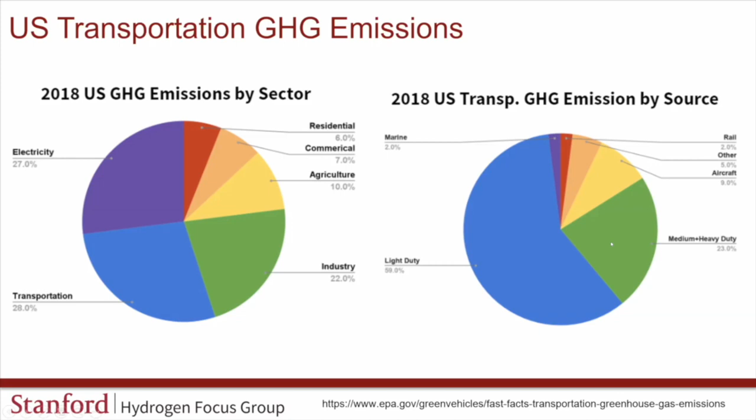So this is our goal. California has some of the most aggressive heavy-duty decarbonization policies.

Here's the one for buses that's being very transformative, the Innovative Clean Transit Regulation enacted by the California Air Resources Board. Starting in 2023, 25% of new transit bus purchases have to be zero emission. This continues until after 2030, when you can no longer purchase a diesel bus. By 2040, the complete fleet has to be zero emission.

The parallel to that for trucks is the Air Resources Board's Advanced Clean Truck Regulation, which states that beginning in 2024, manufacturers have to start selling a certain percentage of their new vehicles as zero emission.

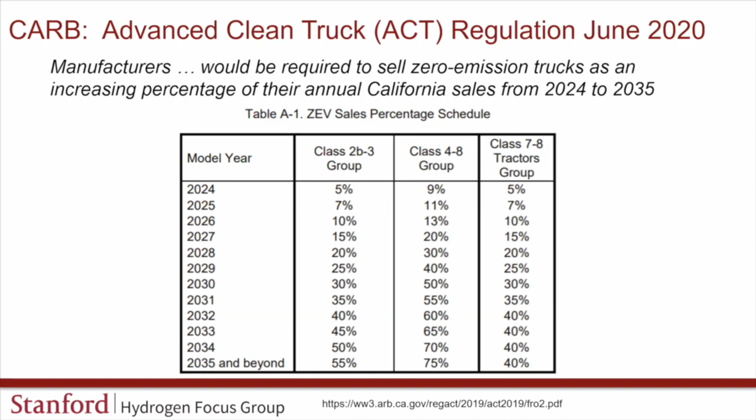Finally, last year, Governor Newsom issued an executive order stating that all drayage trucks have to be zero emission by 2035. And by 2045, all heavy duty vehicles have to be zero emission where feasible.

Transforming an entire industry is really challenging. This transformation will actually affect all of us, as heavy duty freight transport is the main vehicle we use to transport freight across the whole country. So if we are to be successful, we need to optimize across the different options. We are all in this together.

To shed light on the two leading approaches to zero emission heavy duty vehicles, we have compiled an amazing list of speakers from the heavy duty transport industry in trucks and buses. They will help us understand the trade-offs of two of these leading approaches, which is battery electric and hydrogen fuel cell electric vehicles. So without further ado, please help me welcome our first speaker, Ash Corson from Toyota, the Senior Manager of Electrified Vehicles and Technologies. Over to you, Ash.

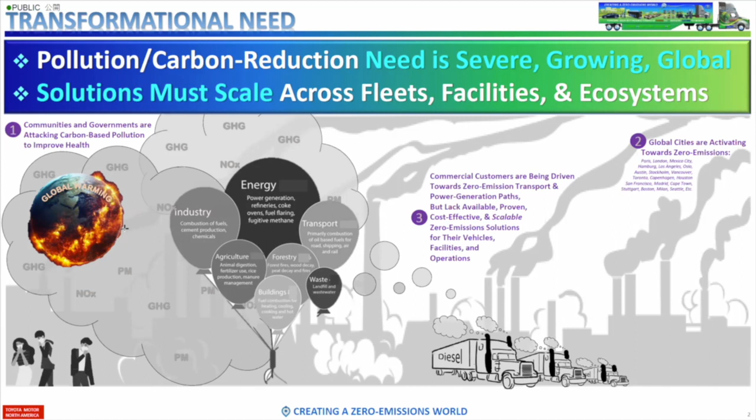The other thing too is that it's an energy transition, right? It's not just simply flicking a light switch. There's a time component to all this, there's an asset component to this. So really electrification is helping customers in their existing asset base and operations transform to zero emissions in the most intelligent way possible. So well described again by E and Jimmy, we're all quite aware of this need for transformation, carbon reduction. It's a severe need, it's growing, and it's global. And the solution, importantly, has to scale across these fleets, facilities, and port type ecosystems that I mentioned.

That solution need is also accelerating. On the public's front, you see a lot of stakeholders accelerating their call to action for zero emissions vehicle adoption at scale. As a result, private industry is really pivoting to add these scalable electrification solutions. One of the most promising, and the topic of today's workshop, is hydrogen and its fuel cell electric scalability. So I think maybe before the pandemic even, which has contributed to the acceleration, maybe 2040 was the target for zero emissions introduction in some of these leading global markets.

And I'd say that's been pulled ahead now, probably to 2035 and even 2030 in some sectors, as Jimmy outlined. So for Toyota, this supports that opening slide, a portfolio approach that's required, and that's simply because there is no silver bullet, one size fits all solution. There are so many different customer needs, operations, and duty cycles that require that progressive approach. So for us, it's not an either-or conversation, it's an and conversation.

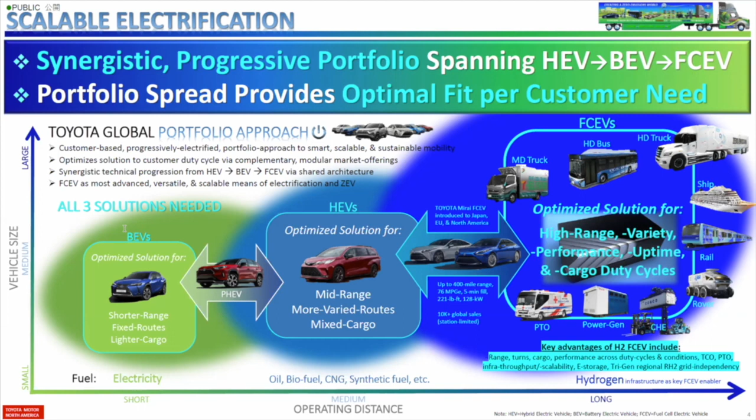We need hybrid electric to help the transition. We need battery electric for zero emissions. We need fuel cell electric for scalable zero emissions. So as you see in the blue area on the right, as that scale increases and you become higher range and higher cargo needs, higher performance, including cold weather, better uptime, higher throughput, hydrogen with its throughput and scalability, and fuel cell electric really comes into play.

So diving a little into the bones of fuel cell electrification in light duty, Jimmy rightly mentioned that the transportation sector is a huge contribution to emissions, and light duty and heavy duty in combination are the two big areas. So it makes sense to have a technology that scales from light duty to heavy duty. On the left, you see the quick mechanics of fuel cell electric. It's basically two inputs: hydrogen, oxygen, and an electrochemical reaction at the stack.

You get water vapor and electricity for electric motors as the two outputs. And it's very modular, based on our hybrid architecture. So take out the internal combustion engine, put in fuel cell stack, take out the gasoline or diesel tanks in the heavy duty example, and put in hydrogen tanks.

And the chicken or egg conversation is quite real. On the right, you see the map of California and all the hydrogen stations. Infrastructure for any of these zero emissions electric technologies is the key enabling factor. We launched our very first Toyota Zero Emissions Fuel Cell Electric Mirai about 6 years ago in the California market. There were 2 retail stations for hydrogen at the time.

Now there's 44 and growing, and in the next 2 years, that's going to triple in size. So thanks to the state of California's leading progression, enabling, 120 more stations are coming online, along with heavy duty stations. We've already progressed those as well with our colleagues at Shell and Kenworth. So there's a lot of activity happening now on the national level too, in terms of starting to seed other regions with the hydrogen infrastructure.

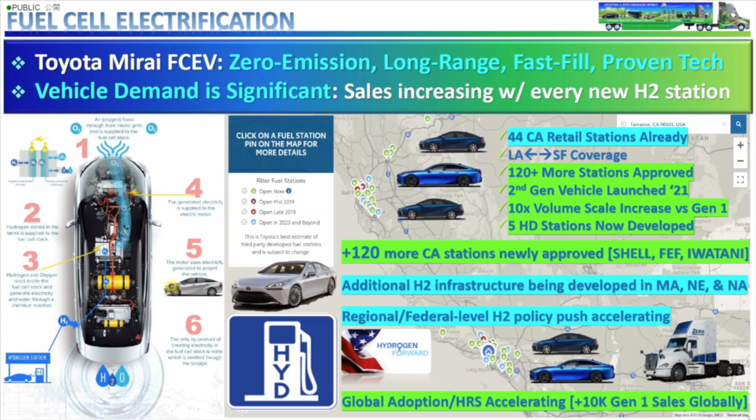That scalability, again, of the technical architecture really gives you a couple of benefits. Modularity is a key one, performance bandwidth is a key one, and plug and play is a really key one, especially in the heavy duty industry, minimizing disruption. Such a mature industry in the sense with a diesel based architecture. So getting to zero emissions as needed really requires minimal disruption.

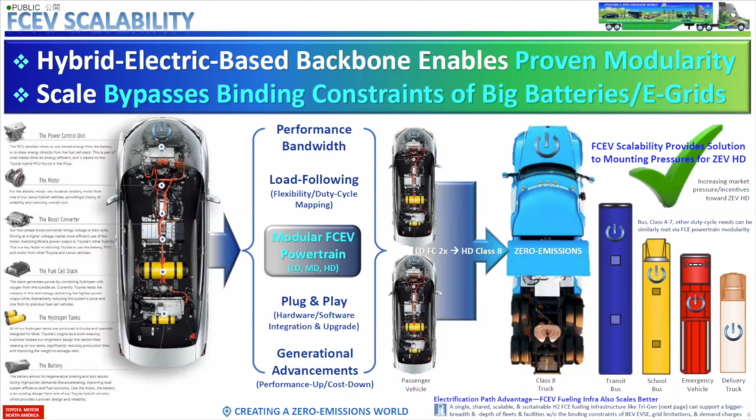And so we were able to upsize 2 of our light duty fuel cell electric architectures into a Class 8 truck, so 80,000 combined weight. And the progression of that, about 3 years ago now, we introduced the first truck with about 200-mile range in Class 8, and through Kaizen, continuous improvement in packaging, performance, and integration, we upped that to 300 miles and improved the package. And now with our colleagues at Kenworth, and you'll hear from Brian in a few minutes, we're rolling out 10 of those with the state of California.

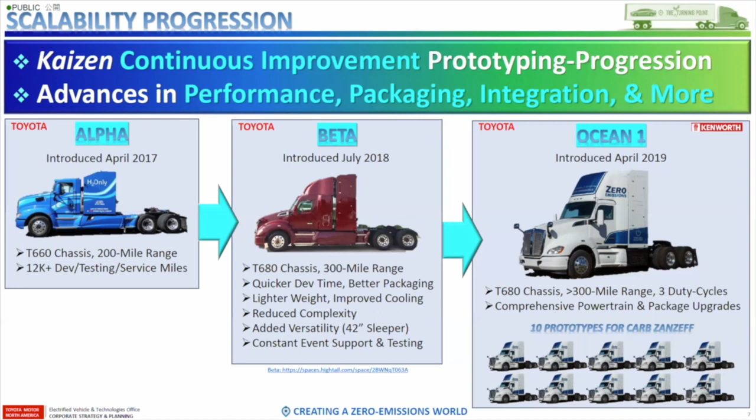What that looks like is really important. It's at one of the world's largest ports, I think the 9th largest, the ports of Los Angeles, Long Beach. So we're rolling these 10 trucks out at scale now with 4 different operators, including UPS and Toyota itself. Importantly, across 3 duty cycles.

So we have car carriers, we have local kind of UPS type delivery, and then we also have drayage, which, as Jimmy mentioned, is one of the key needs here in the state of California and globally. The variety of drayage routes in terms of the cargo, often the fleet drivers and operators don't know what they're picking up and where they're delivering until they actually get their container at the ports.

And so that necessitates a versatile, flexible machine, if you will, that can go a lot of range if needed, or go up high grades if needed. A lot of variability in those routes, and fuel cell electric with its higher range is a good fit for that. We're continuing to progress. I think on the left you see these first generation trucks.

I think Brian was actually at the wheel for some of this, proven in a variety of conditions, including at high altitude at Pikes Peak. And then we were already into our 2nd generation system.

In the past two months, we actually launched our 2nd generation light duty product, the new Mirai, which is a beautiful game changer, about a 10x increase in scale. And we just shattered our volume sales record this last month.

So many people remember the 2nd generation Prius. Not many people remember the 1st generation Prius, but the first one was a very unique little guy, if you will. And the second one was what really hit mass market.

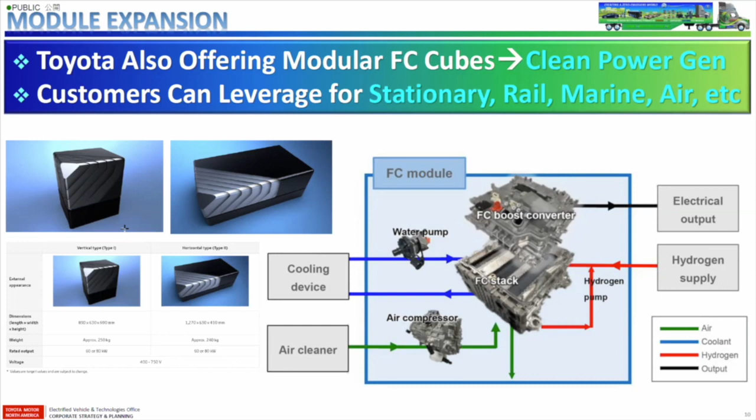So rapid progress. We're also offering modularity, leveraging that, because it's not just a mobility need, really it's a clean power need. I think Ian and Jimmy both mentioned this as well. There's need for this in the harder to abate areas, the stationary power generation, the rail, the marine, the air. So we're introducing modular cubes, different sizes and shapes and outputs to help customers do that.

Infrastructure, I've stressed several times, and again, for a good reason. All of this transition to electrification, this e-growth, really has to be enabled and supported by a flexible e-infrastructure that can scale as fleets shift their asset base over time from internal combustion to battery electric and fuel cell electric and hybrid.

You need a flexible infrastructure that can do that, because as we all know, infrastructure is an expensive investment. We're doing that ourselves as Toyota, installing a tri-generation plant at our port facility in Los Angeles area. A giant stationary fuel cell takes biogas and converts it to renewable hydrogen for fueling fuel cell electric vehicles, trucks, cars, forklifts, etc. It can also be used as energy storage, but also produces renewable electricity for battery electric vehicles, and also for the facility itself, and even exporting back to the grid.

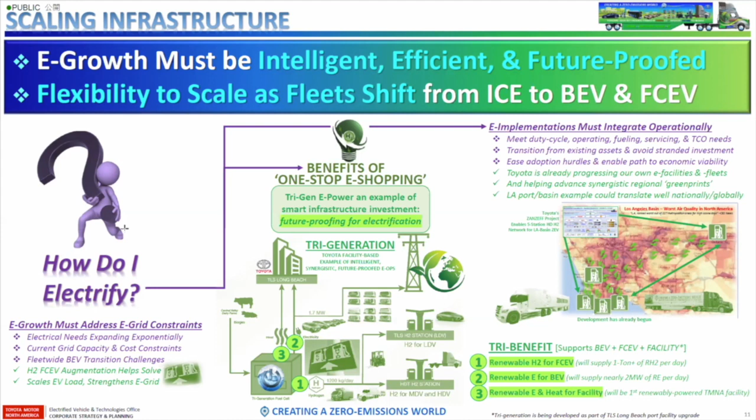So again, it's not an either-or conversation, it's an and conversation. I think he already had this great chart from the DOE on the left. It's a wonderful thing, again leveraging our current national assets in terms of the electrical grid. We need to bolster that, strengthen that, grow that, as well as our natural gas infrastructure.

Hydrogen can play a key role in both bolstering these two, the electrical grid and the gas infrastructure, as well as harnessing it in many versatile ways, capturing renewables, using energy storage, and then also fueling vehicles and returning electricity back to the grids as needed.

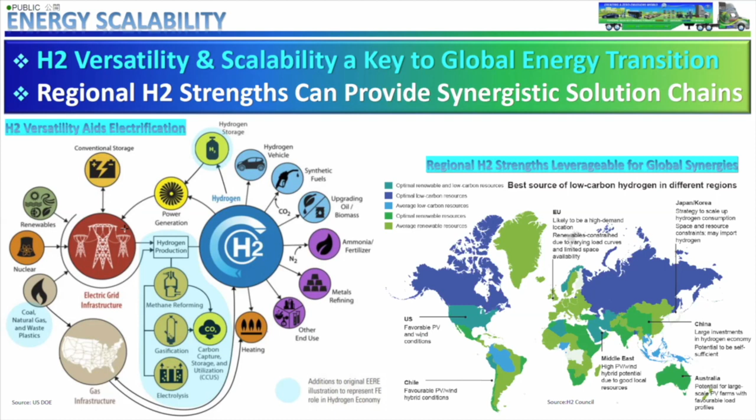On the right, a little bit of a smaller graph, apologies, but long story short, the US as a nation is quite well suited with its favorable solar and wind and natural gas reserves to have hydrogen as a key part of the transition. And my last slide, again, just pulling back to the full global picture, a lot going on, but there's maybe three key messages.

One, that global momentum is really increasing towards hydrogen. China, Korea, Japan, Europe, North America, all increasing hydrogen production for mobility. I think that's a key point.

Hydrogen has been widely available and produced, and it's part of the industrial ecosystem for a century now, right? Most of that's for the more industrial kind of refining type activities. Unlocking it now for mobility is the exciting momentum that we're talking about.

And these places at scale, like China, is arguably the quickest example that hits the wall first. It's relatively easy to convert a few vehicles or a small fleet to electrification using battery, for example. It's a lot harder to convert an entire port ecosystem or a country to electrification. So hydrogen really is needed as well.

And as a result, there's been a lot of investment and a lot of things coming online now for production of hydrogen for mobility, as I mentioned, and also the stations themselves, both light duty and heavy duty around the world. So in summary, trying to keep us on track time-wise, hydrogen is a real key to this energy transition to electrification.

And it really enables scalability and sustainable electrification, which as Ian mentioned from the outset, those are some really key important tenets. So thanks, happy to answer any questions later, but I appreciate the time. Thanks so much.

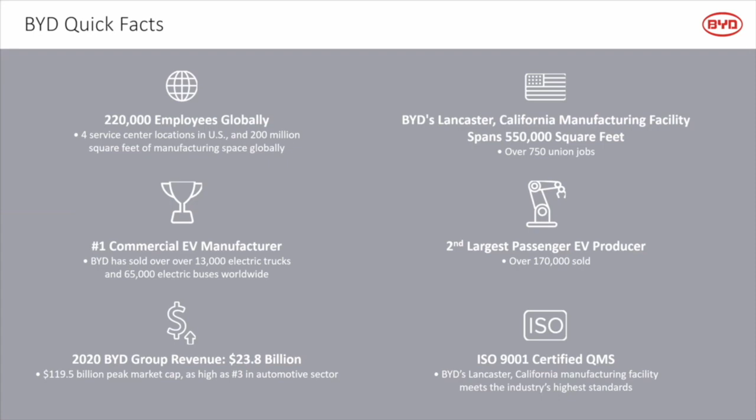We have something on the order of 200 million square feet of manufacturing space globally, including manufacturing space here in California with a facility in Lancaster that spans over 550,000 square feet, where we're manufacturing buses and trucks for heavy duty applications. Right now, we've sold over 13,000 electric heavy duty trucks worldwide, and over 65,000 electric buses. BYD's group revenue was around 24 billion last year, and we're an ISO 9001 certified manufacturer.

Taking a quick look at the business divisions of BYD: there's commercial vehicles like we're speaking about today, heavy duty electric trucks, heavy duty electric buses, forklifts, passenger vehicles—all EVs. There's a consumer electronics division, a batteries division, stationary energy storage, and a solar module division. Most recently, BYD is involved in a SkyRail Sky Shuttle product that's all electric, and was recently named an awardee to develop a project in Southern California.

In our manufacturing facility in Lancaster, we have over 750 manufacturing jobs. Those are union jobs, working with the SMART union and Jobs to Move America to bring these kinds of positions to the United States.

Overall, it's important to understand BYD's core competency is in batteries. It started as a battery manufacturer back in 1995. If you had one of those cell phones back in the late 90s, it probably had a BYD battery inside. The company moved into electric vehicles in the early 2000s, so we've been at this for some time.

Perhaps one of the most interesting points is that in these heavy duty applications, we use an iron phosphate battery chemistry—lithium iron phosphate—and there's a lot of reasons for that. There are obviously a lot of different chemistries on the market, and every manufacturer is striving for things like more energy density, more cycles, and looking for ways to make those batteries safer.

One reason we use this battery for this application is because it cannot enter into a thermal runaway event—the chemistry itself prevents it. Even if you set it on fire or puncture it, you can't get to that type of event where the energy input keeps increasing and the heat keeps increasing to where you can really have damage. So overall, the core competencies of BYD are battery technology, electric drivetrains, and electric motors.

To get into a little bit of the details without diving into every vehicle that we have, I thought I'd just throw up a few case studies. At BNSF Railways, we have some of our yard trucks deployed. They're easily doing the duty cycle there, which ranges from maybe 10 to 15 hours. And really, those trucks are always near a charger because they're in a yard, but they essentially can go multiple duty cycles. I've actually seen at ports where these trucks have gone 2 full shifts. They can even go 3 shift days, again, with some opportunity charging throughout the day. So again, it's a very well-fitted application for electric.

Now, the tough part about refuse is they've been pulling weight out of refuse trucks for decades. So with batteries, we're battling the fact that you're adding some weight, and that is probably the biggest challenge compared to a diesel. As they compact the refuse down as much as they can, they've taken all the weight out of those trucks. And so when you add a few thousand pounds, that's a few thousand pounds less payload that you can carry. But of course, there are a number of municipalities and cities around the country that are really wanting to go emission free. And in terms of the duty cycle, these trucks perform very well.

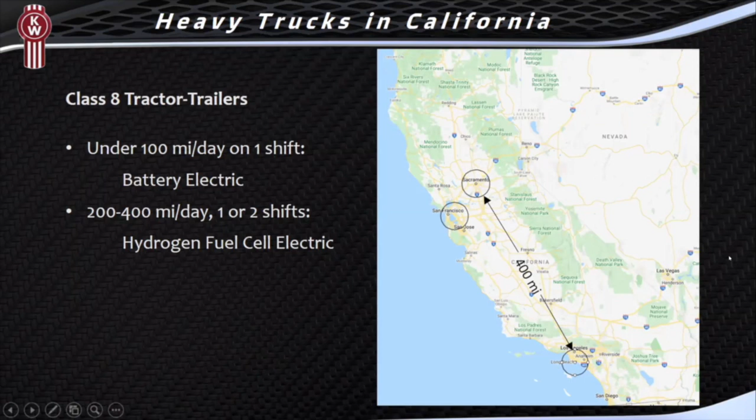But the way we say it, as Ash mentioned, there's no silver bullet. There's no one size fits all for everybody. We're going to need both of these technologies to be able to move toward true zero emissions.

So let's take a look first at comparing diesel and compressed hydrogen and battery electric trucks on a regional haul kind of operation where a truck does 350 miles on 2 shifts. So they might run 100 miles during the day and then at night take a longer run of 250 miles, 125 out and back. So with today's diesel truck, the fuel you need, probably 70 gallons to do that 350 mile run. The fuel itself weighs 500 pounds. The tank you put it in, 150. So you've got 650 pounds of fuel and tank on board.

And with that kind of arrangement, today's trucker can haul about 50,000 pounds of payload and still stay within the 80,000 pound gross combination weight limit that most states have. So if we look at a fuel cell truck, it takes a little bit less load in fuel, the tanks today are pretty heavy because they're high pressure tanks. But for a zero emission truck, you're allowed 82,000 pounds now. So even though we gained 4,000 pounds, we still are pretty darn close to the same payload with a fuel cell truck that can go that kind of range.

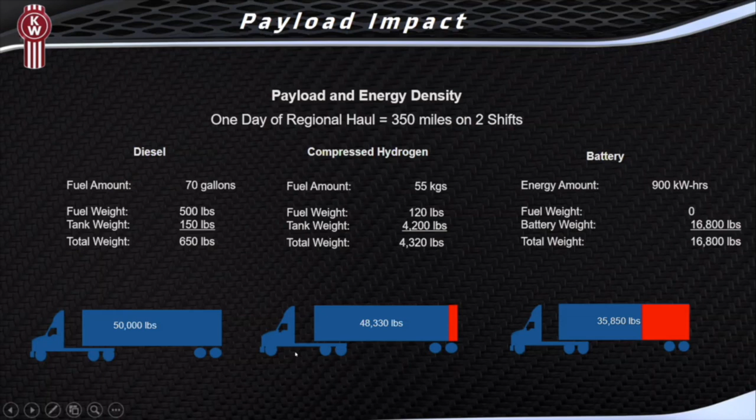Then with a battery electric truck, to go 350 miles, mostly at highway speeds, you're going to consume about 900 kilowatt hours. And so you need a bigger battery than that so that you've got some margin and so that you don't run from zero state of charge to 100% state of charge. So by the time you have a battery large enough to do that, it's going to weigh a whole bunch and you've lost about a third of your payload capability. So as Aaron mentioned, when you get into the longer ranges, it can hurt in terms of tare weight and lost payload opportunity. So there's an advantage for fuel cell there, but both of them are a little disadvantaged against diesel.

Now, if we look at productivity, in other words, refuel recharge time, diesel refuels very fast. You can put 70 gallons in under 5 minutes. So that's really not an issue. Compressed hydrogen, 15-ish minutes to put the 55 kilograms into this kind of an arrangement. So that really isn't much of an impact. But battery electric takes a bit longer. Even at 250 kilowatt rate, that's still 3.6 hours to put that much energy back into the truck. So it makes it difficult to do a 2-shift operation if the truck needs to be stationary for that length of time to be recharged.

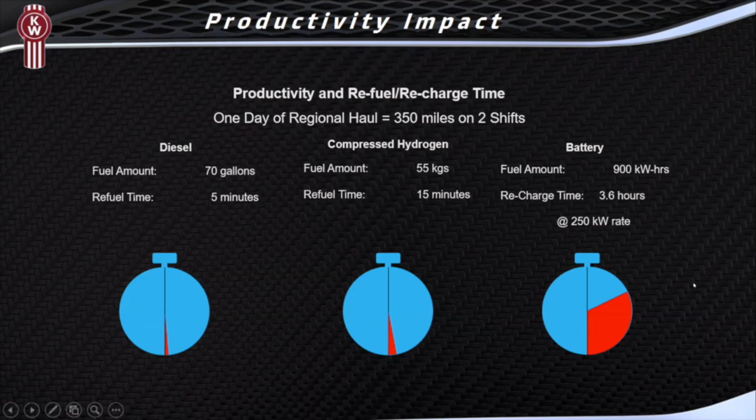Another issue is that you can refuel a diesel truck at pretty much any truck stop. You can refuel a hydrogen truck at a hydrogen station that isn't on site because you're only there for 15 minutes or so. But a battery electric truck, you're going to have to park it there for quite some time, longer than the driver is going to want to wait for it to recharge. So that's probably going to mean that you have to put in some infrastructure at your truck terminal on your own site. So that means you have the capital expense yourself.

So if we look a little bit at cost, Jimmy asked us to include some costs. So these are approximate costs at about 4 years out from now. A diesel tractor might be in the range of $150,000. So by the time we pay federal excise tax and California sales tax, this happens to be in the LA County area, you're about $180,000. Fuel at $3 a gallon is a little higher than that today. Each year you might do $63,000 in fuel.

So if we look at a fuel cell truck, they're pretty expensive right now. In fact, at our one-off kind of quantities, they're about double this cost. But over time, we expect by the end of the decade, we'll be getting much closer to parity with diesel. But today, and even in 2025, they're quite expensive. And that high purchase price means you pay a lot in federal excise tax and a lot in sales tax, even though you're not getting the road benefit for those extra dollars.

Fuel cost might be in the range of $10 per kilogram in this kind of time frame. That will be coming down over the next decade as well. So that's a bit higher. So it does cost more to run a zero emission truck than a diesel truck.

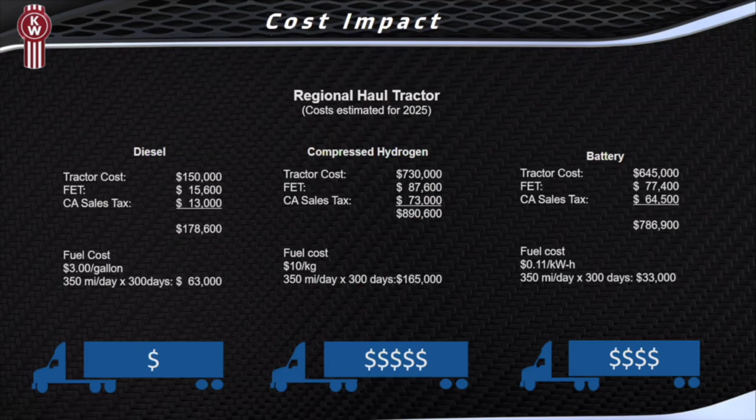So those are some comparisons in the 2024-2025 timeframe, and we hope that by the time we get out into the 2030s, those costs can come down some. But we need to get volumes up and need some incentives in order to get there.

Some brief considerations on batteries that you would use in a fuel cell truck. Since a fuel cell truck is essentially, it's got all the same components as a battery electric truck. It's got an electric traction motor and it's got batteries. It's got all the cooling systems. It's got electric power steering and electric brake air compressor and electric HVAC components. Then you add the fuel cell and the fuel tanks.

But you can either use a small battery with stronger load following fuel cells. And so that means the battery is lower in weight and it's smaller, but you really hammer it with C rate. But you get a little bit less length of grade that you can sustain and less energy that you can store during regenerative braking.

Or you can put a larger battery in, and again, you gain in terms of grade duration and braking availability for regenerative braking. You can typically use a lower cost cell in the battery, but it's bigger and it's heavier, and it's more expensive also. So those are some considerations that we're weighing as we go through future fuel cell designs.

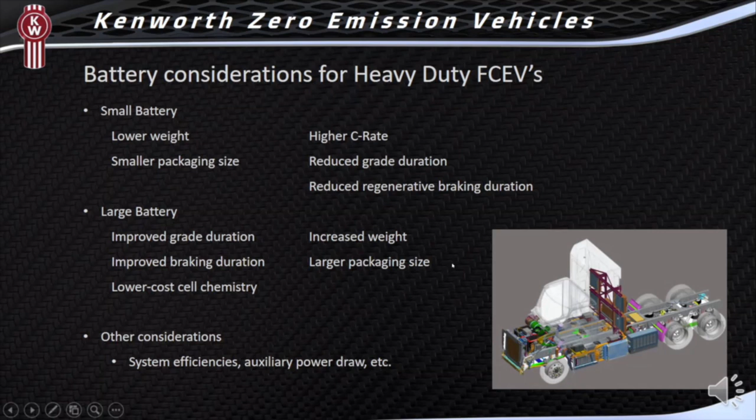Challenges that we face in building zero emission vehicles: the supply base is still developing. A lot of the suppliers for this are just getting into the industry now. Their reliabilities are not as high as we'd like. And components are not plug and play at this point. They take quite a bit of development to incorporate them into our truck designs. There are some rather complex architectures for the cooling systems and the electrical and control systems, and we've worked through most of those issues at this point.

We're also learning that what the driver needs to know on a zero emission truck is different from what he or she needs to know for a diesel truck. So we're learning how best to present the right information at the right time to the driver.

I talked a little bit about batteries for high power for sustained grades. If you're running over the Grapevine, for example, you need to be able to sustain high power for quite some time. And that can either come from batteries, or it can come from the fuel cell, or it may need to come from both. So we're still working through how best to accommodate that.

And then the fueling infrastructure, as Ash mentioned, there are, I think, 5 truck fuel stations today in the LA area. That's about it for the country. So there's quite a bit of fueling infrastructure that needs to be built out for hydrogen. Again, also for charging, if we do wireless charging, there's not much infrastructure for that yet. But smaller rate battery charging can be done at the 150 kilowatt range, but then that takes longer to charge these big batteries.

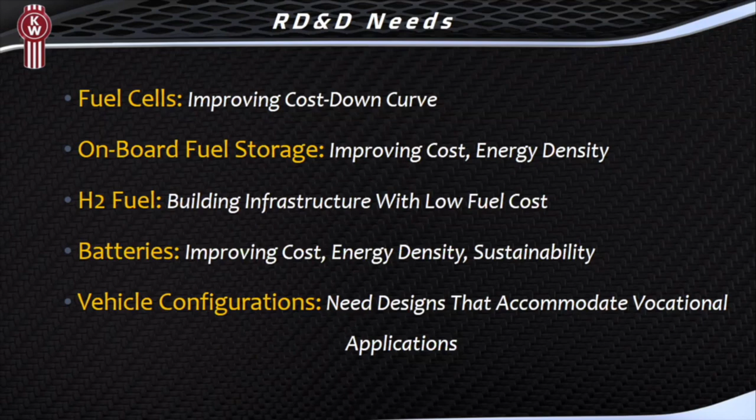And then so far, at least at Kenworth, we've looked pretty much at tractors. But as Aaron mentioned, we need to be able to look at other vocations such as refuse packers and dump trucks and concrete ready mix and utility trucks and a whole host of things that have some very specific body design requirements that need to be accommodated. So we'll be looking into how to accommodate those.

So with that, I'll wrap up and I will hand off to the next speaker.

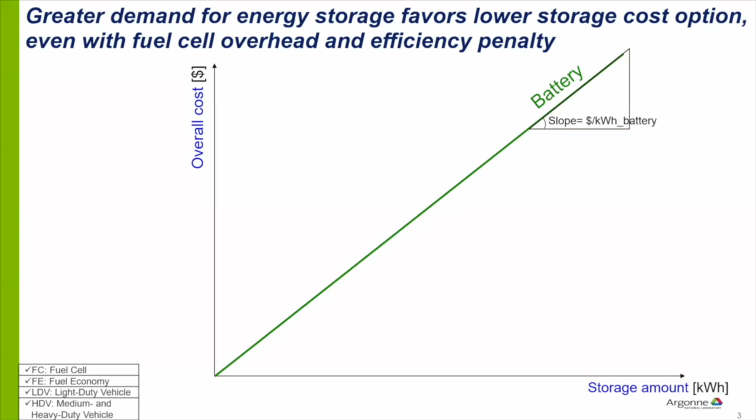So this is actually where I would like to start, on the vehicle side, and we'll get to the fuel side. So if you look at battery electric vehicles or trucks, I will compare only the powertrains here. Dollar per kilowatt hour represents a slope on overall cost for powertrain on the vertical axis, storage amount on the horizontal axis.

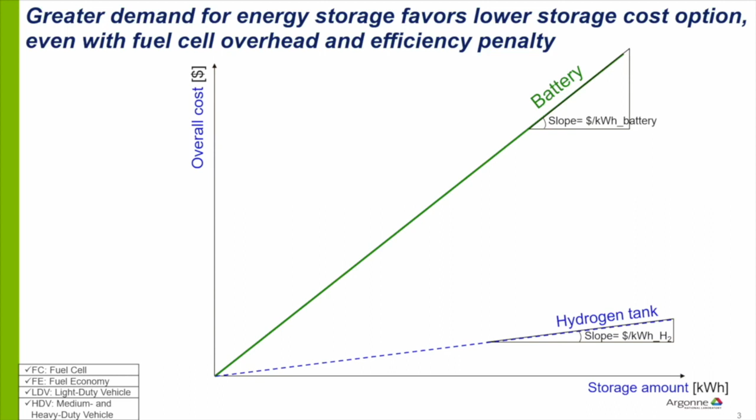Hydrogen storage is always lower cost, and therefore the slope is lower, but because hydrogen fuel cell trucks are less efficient than battery electric trucks, we need to account for that, adjusting the slope with the fuel economy ratio, because I will need more storage for the hydrogen truck in kilowatt hours compared to a battery truck. Furthermore, a hydrogen truck will require a fuel cell, which you can consider an overhead, and a battery for the hybrid feature to be able to maximize the efficiency.

So this will lift the blue curve to intersect with the battery powertrain curve at some point. That point may shift right or left depending on what I just mentioned: the cost of the battery, the cost of the fuel cell, the cost of the hydrogen storage tank, and the fuel economy ratio. All of these will play into where that intersection point is.

But there will be some intersection point, and you will see to the left, the blue curve is above the green, and this will be consistent with low onboard energy use, low daily fuel use. To the right of that intersection point, you will see a high demand for onboard energy storage because perhaps of a high daily VMT, or a low fuel economy, or both.

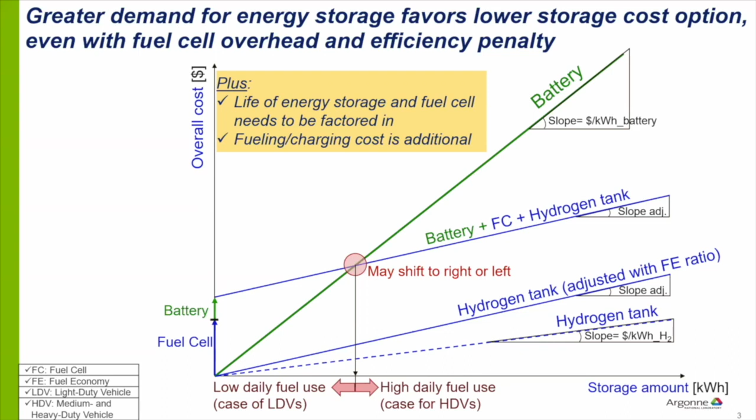However, this is not the whole story. Of course, we need to consider other aspects that are critical to the cost of ownership: the lifetime of the energy storage, whether it is a battery or fuel cell, over the lifetime of the vehicle, and more importantly the fueling cost or the charging cost, because this will be on top of the vehicle cost when you consider your levelized cost of driving. So this will take us to this slide.

It matters, not only the vehicle costs according to the previous slide, but the fuel costs for trucking could be significant. This will depend on your daily VMT, as the previous speaker mentioned, and also your fuel economy. But I'd like to highlight that it's not just the fuel economy in absence of a baseline.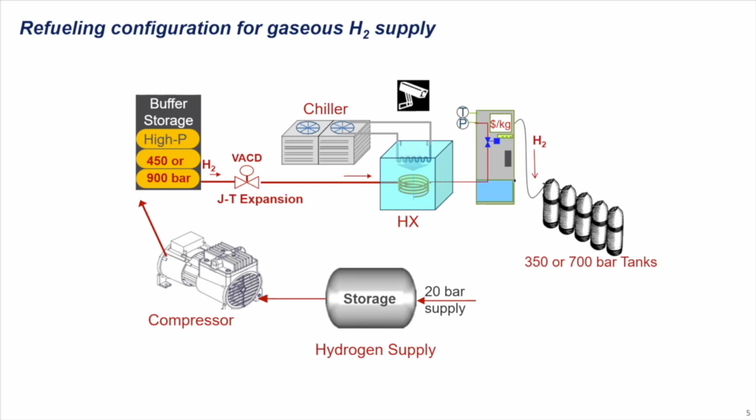What I want you to walk away with from this chart is that onboard storage matters. It will matter to fuel costs, and fuel costs matter according to our previous chart. So I wanted to take you to a different slide.

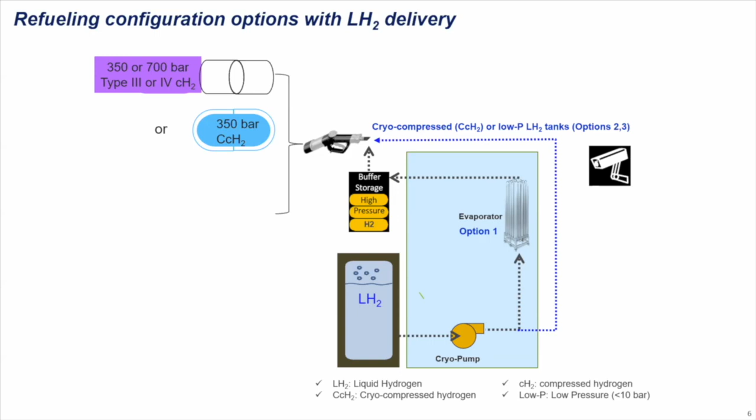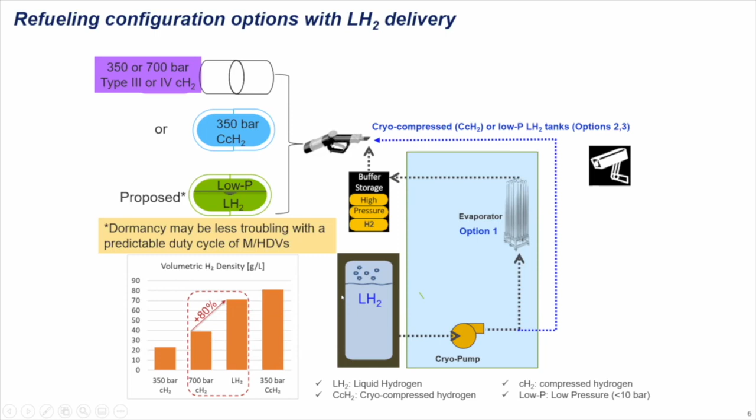If we want to look further, we can look at some advanced tanks like cryocompressed or even a liquid hydrogen tank, which would be very similar to an LNG tank. This one will have high payload and doesn't even need to be pressurized. So your fueling equipment could be much lower cost and the configuration much simpler.

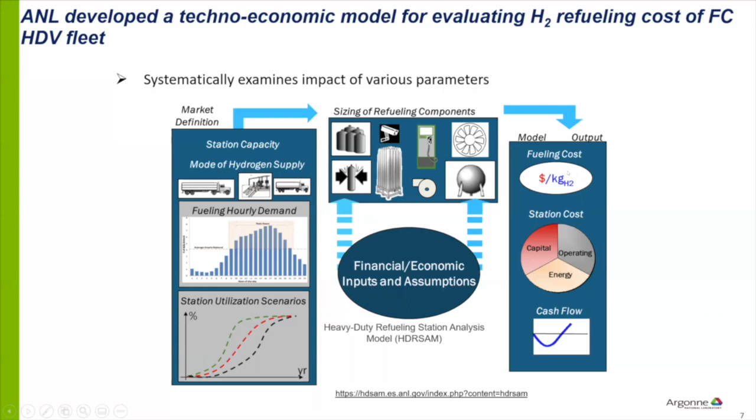With that, we developed our model. This model is used by thousands worldwide—transit agencies, energy companies, gas companies. It's really a bottom-up techno-economic model, using quotes from vendors on the components, and we build it bottom up to tell you what is the dollar per kilogram. This is only for the fueling station, only the contribution of the station. On top of that, you need to add delivering the molecule.

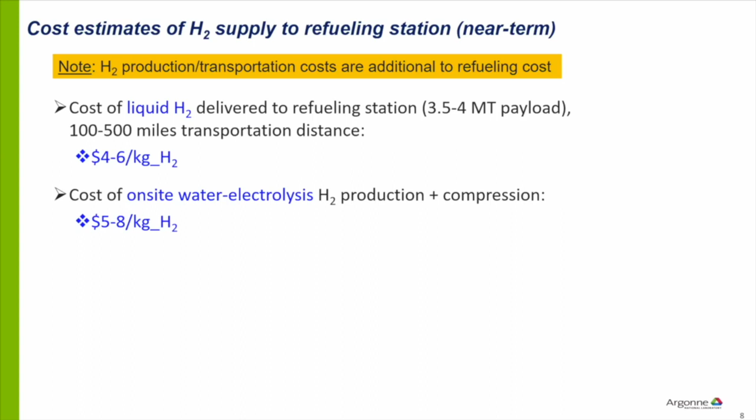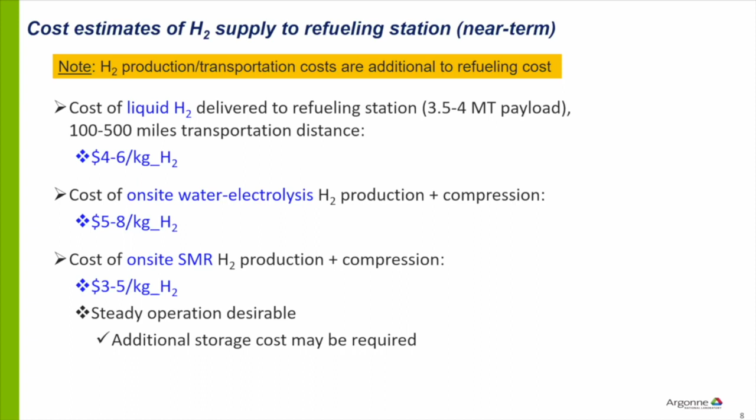If you source liquid today, you can get it somewhere between $4 to $6 per kilogram, depending on the payload and the distance. If you do on-site electrolyzer, it could be higher, but of course you will need some additional storage. If you do SMR, it could be lower, but this is usually a fossil source. In addition, SMR likes to run continuous, so if you have a fleet with some fueling variability, you will need some cost of storage there. So this is the fueling cost.

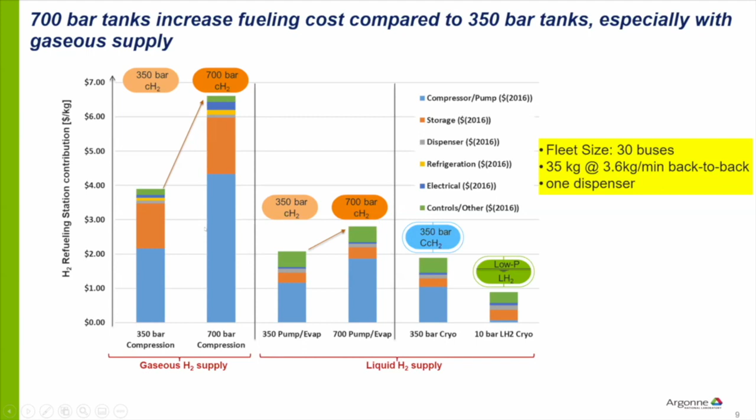Look at the liquid hydrogen tank. If this tank is being developed - and I know DOE is funding a lot of research on this - we know Daimler Linde really did talk about this tank. Your fueling contribution could actually be less than $1 per kilogram. This will be much more attractive than these high pressure tanks.

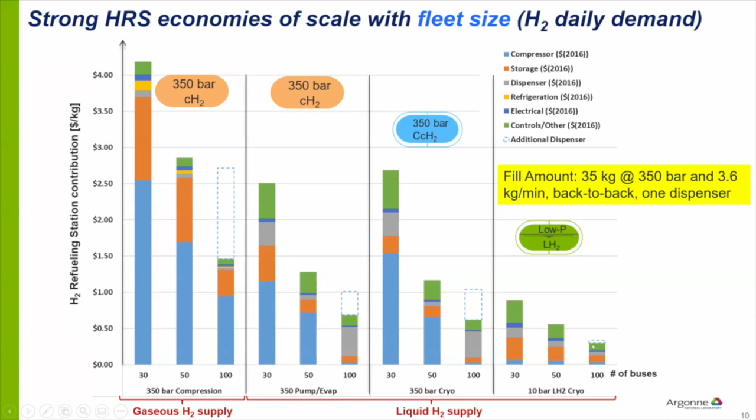Fleet size matters too - 30 trucks versus 50 versus 100. Here I just put buses, but this is 35 kilograms each. You can see the economies of scale. Even if you reach a very large number and add a dispenser, you can still be at a reasonable cost. Again, liquid supply is much lower compared to gaseous supply. And look at the liquid hydrogen tank - you could even dip the fueling station contribution below $0.50 per kilogram.

However, liquid comes at some penalty. You have energy efficiency considerations - we're talking about 10 kilowatt hours a kilogram. So it is important, when we look at carbon, that this electricity for liquefaction should be from a zero carbon source. California has a low carbon grid. In the Northeast here, there is a lot of hydro, but in other places it might have a higher carbon footprint. So when we look at liquid from an economics standpoint, we cannot overlook the carbon footprint associated with liquefaction. I just want to mention that there are many liquefaction plants coming online because of the growing demand.

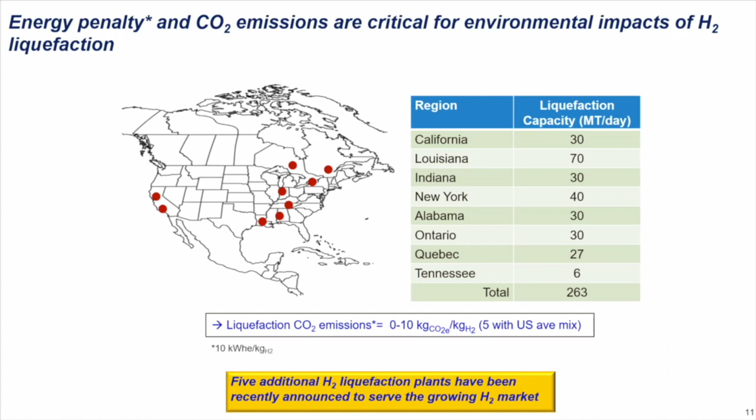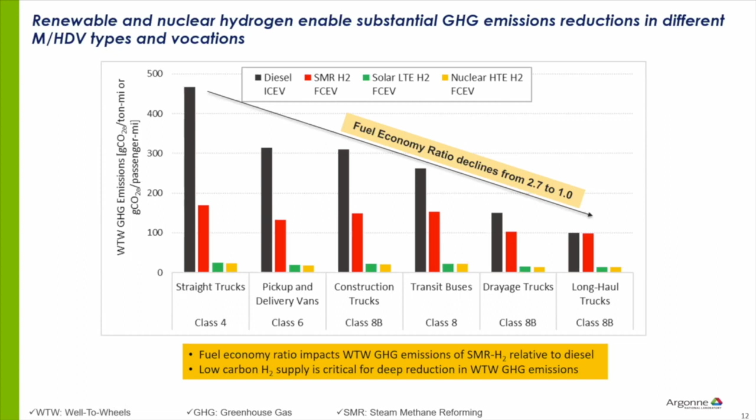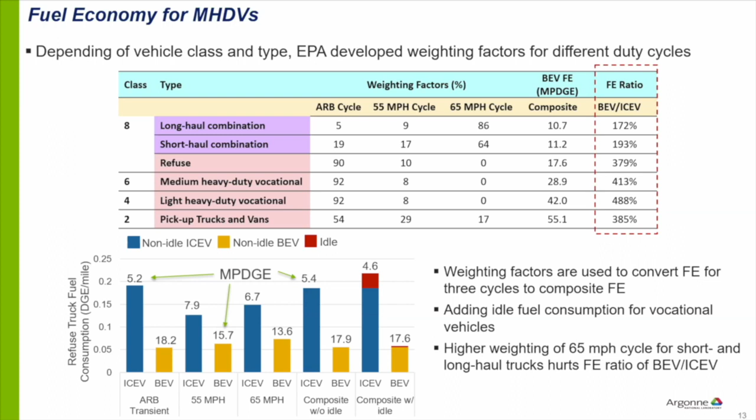If I move to battery, again I put here similar vocations and the fuel economy ratio. For some it is really close to 5 times, while for some it is less than a factor of 2 compared to diesel. Again, the driving cycle will play a big role in your fuel economy ratio, which will play a big role in how you compare to diesel, and what unit energy cost - whether it is electrons or hydrogen - you can really break even with diesel on a per ton mile or per passenger mile basis.

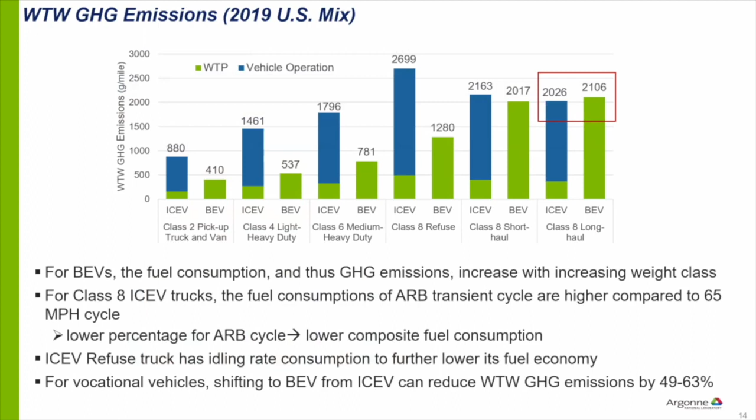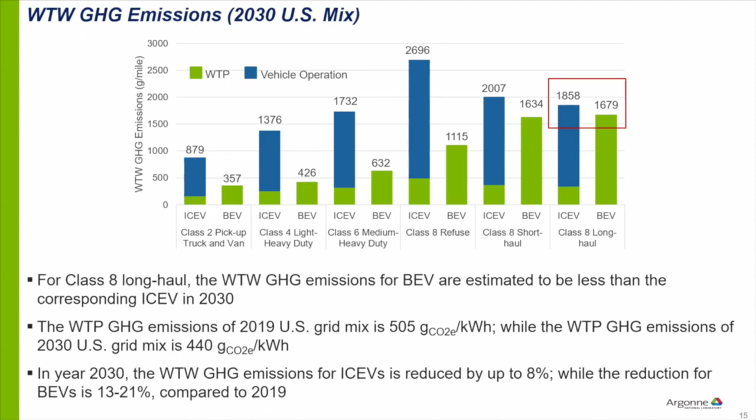Here is the greenhouse gas emission comparison - very favorable, even with the US grid, where you have the high fuel economy ratio, but when you go to the longer haul, you're roughly breaking even. This is the 2019 US grid. Of course, if you look to the future, we know the grid is getting cleaner, so the picture will be better, but the advantage on well-to-wheel carbon emission will still be significant. We know the US grid is actually very different in different regions, so here I show you the different regions.

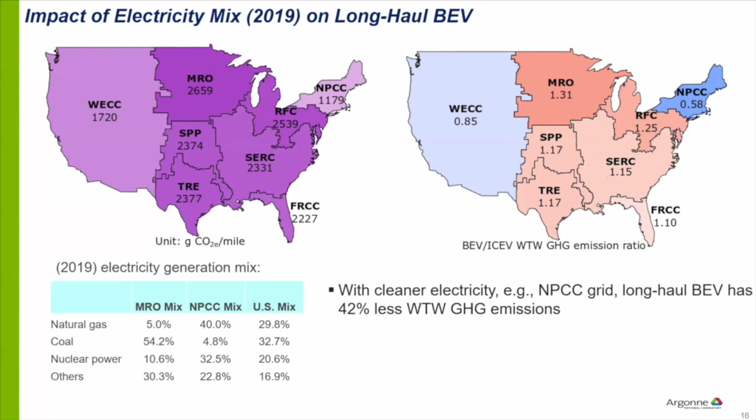As far as charging cost, I will defer that. We are developing a similar model to the hydrogen model that we will release this summer, and there I can talk to you with more informative analysis on the fast charging of battery electric trucks.

With that, I want to acknowledge the Hydrogen Office and the Vehicle Technology Office, who supported our work in the past. Here are the links to our models. If you are interested in our life cycle analysis model or techno-economic models, they are available for free download. Thank you very much, and back to you, Jimmy.

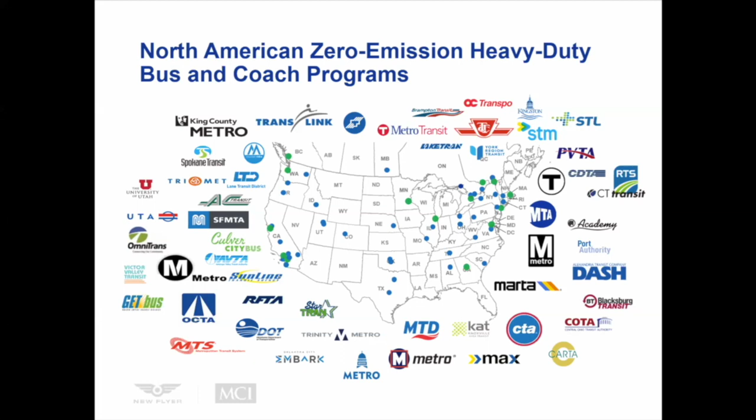At a very high level, both fuel cell and battery electric technology are on similar trajectories of advancement, both in reliability, performance, weight, cost, and energy density. Since 2012, we've been testing, deploying, and supporting approximately 250 battery electric buses in service, and we've used these lessons learned over almost a decade to drive innovation. All three generations of our battery electric buses have been built on the Xcelsior heavy-duty bus platform.

We offer electric buses in 35-foot, 40-foot, and 60-foot models. The vehicle itself incorporates batteries or energy storage systems located on the roof and in the engine compartment. We utilize proven ZF axles and Siemens PEM motors that eliminate the need for a transmission.

The Xcelsior Charge NG incorporates three distinct high-performing new technologies. First, it integrates battery packaging for the energy storage system designed and developed by New Flyer, which lends significant maintenance and operation benefits to operators. Secondly, the next generation ethically sourced high energy batteries deliver 13% more energy density, allowing us to improve range and weight optimization for the vehicle. And third, we've introduced our latest traction propulsion system from Siemens, the ELFA 3.

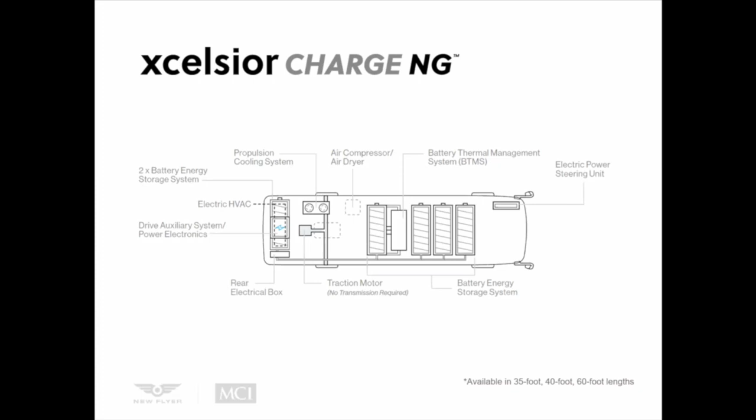Our fuel cell journey began back in 1993 with prototype technology, followed by a 20-bus evaluation program in the 2010 Olympics, which helped to lead our current generation platform. Also built on the proven Xcelsior platform, the Xcelsior Charge H2 utilizes the same robust electric propulsion system as the Xcelsior Charge, featuring industry-proven Siemens and ZF components, as well as Ballard fuel cells. It's available in 40-foot and 60-foot configurations, both of which are operated by AC Transit.

Fuel cell buses use a battery-dominant hybrid architecture where the batteries are large enough to handle the vehicle performance needs, while the fuel cell acts like a continuous battery charger to handle and extend the range of the vehicle. So as you heard from Sal a little earlier on this panel, the comparisons are definitely helping to inform the use of both technologies in public transit.

If you can imagine though, the energy consumption and therefore the vehicle range is really highly dependent on climate, topography, duty cycle, and driving techniques. So for transit buses, these are vehicles that open and close their doors all day long and have significant energy draw for heating and air conditioning in extremely hot or cold climates. They're drawing quite a bit from the battery.

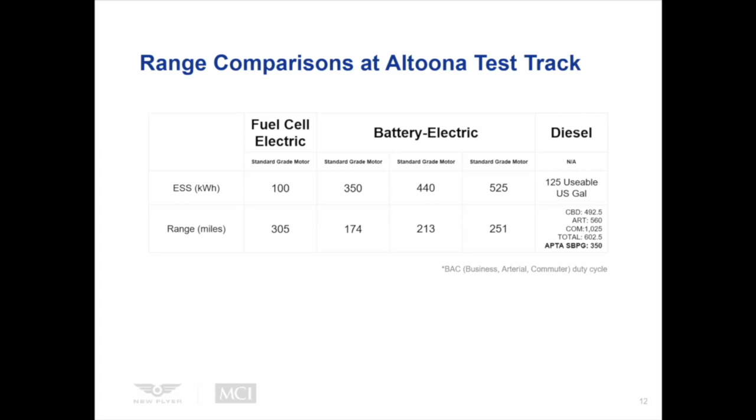However, it's actually very close in the Altoona testing protocol at 305 miles. And we actually did manage to test one of our fuel cell vehicles to 352 miles back in 2019. So I think we're getting really close with the fuel cell electric model.

Similarly, when asked about price comparisons, my answer is always, it depends as well. Heavy-duty transit buses are typically highly custom engineered to meet our clients' specifications. But in the interest of an apples-to-apples comparison, what I've included here is pricing from the Washington Department of Enterprise Services contract. This is a fairly basic specification and kind of a publicly available contract to show pricing.

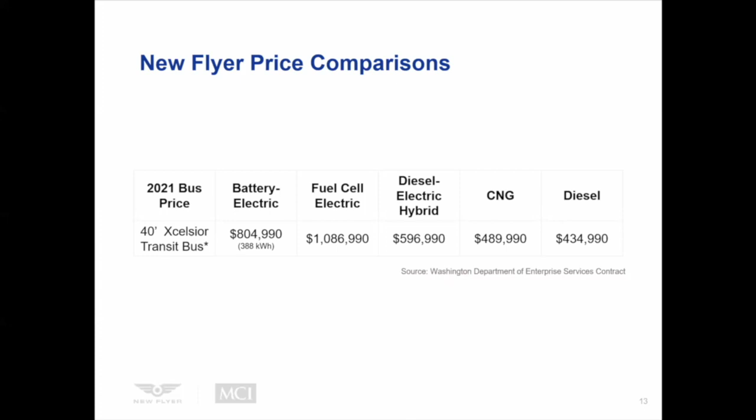And you can see that the lowest capacity battery electric bus is almost double the price of a similarly configured diesel bus. And a fuel cell electric bus is approximately 2.5 times the price, just based on today's technology. I would like to talk a little bit about price trends, however. Prices are coming down, with the fuel cell electric buses on a greater trajectory, largely due to some cost decreases in the fuel cells themselves, and due to some common technology and manufacturing techniques with battery electric buses.

On the battery electric bus side, we are seeing advances in battery chemistry and in energy density. And while battery electric buses are dropping in price for a specific energy storage capacity, since the range is not quite meeting what the industry needs right now, as energy density improves, customers are basically opting for more batteries on board the bus and thus more cost. So if you were to plot actual battery electric prices, you would probably see a flatter curve on the battery electric buses.

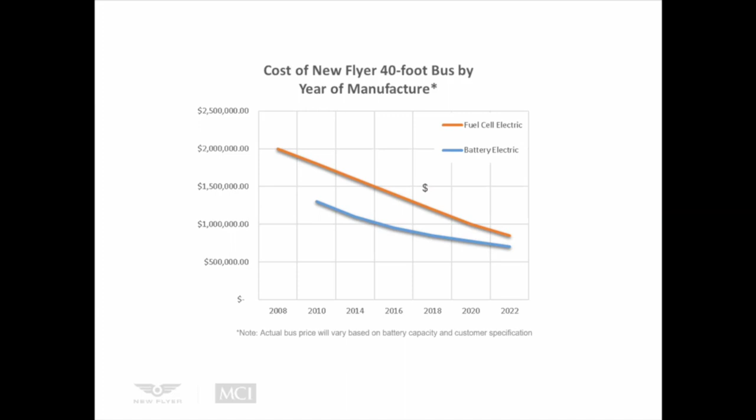So these costs are really just dealing with the bus itself. They don't include fueling or the charging infrastructure. And when I'm asked about that, I say it really depends, especially at scale. For battery electric buses, whether you choose depot charging or an en route charging strategy, electrification comes with an infrastructure investment well beyond the chargers. It adds construction complexity combined with the challenge of finding and running enough power from the grid to support charging.

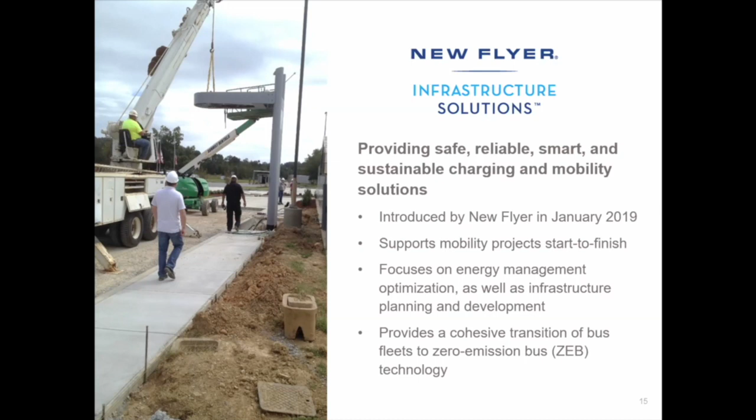Several of our customers who operate CNG currently have actually found the transition to hydrogen to be much more compatible with their operation. But today at New Flyer, we proudly offer New Flyer Infrastructure Solutions as a full suite service. This team, which has grown since announcing it in early 2019, has installed and services just over 200 chargers across North America today.

The number of fuel cell electric buses ordered also appears to be growing and keeping pace with the other types of zero emission vehicles. We've been really pleasantly surprised by the interest and engagement from our customers on the Xcelsior CHARGE H2 fuel cell electric bus. At the current time, fuel cell electric buses are approximately 10% of the zero emission vehicles in our market and in our deliveries.

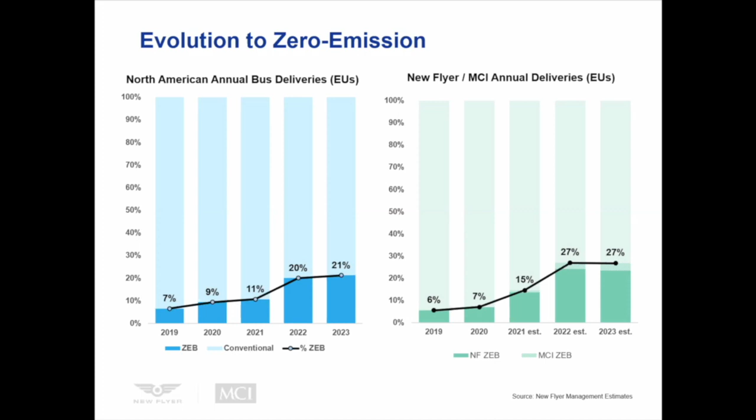So in conclusion, at New Flyer, we believe there's an appropriate solution for all 3 zero emission technologies, and that selection is really highly dependent on the infrastructure available in our cities, local energy costs, and the proposed duty cycle for the vehicles. While there's certainly a capital cost premium for both the vehicles and the infrastructure, many agencies are now obtaining enough data on both battery electric and fuel cell electric bus operation to compare the economics of the fleet at scale and enable them to evaluate total cost of ownership and determine the best mix of zero emission buses for their fleet.

The new Biden-Harris administration has just announced $30.5 billion for public transit, allowing agencies to plan for resilience, remobilization, and revitalization on a long-term basis. Zero emission public transit is a priority. I'm really hopeful in the outlook for public transportation.

Both the US and Canada have realized the importance of equitable, accessible, and sustainable transit, and have made milestone announcements to fund the expansion of transportation and infrastructure over the next several years in support of climate change mitigation. So I truly believe we have this wonderful opportunity in front of us to work together as enablers of a new and greener mobility era. Thank you.